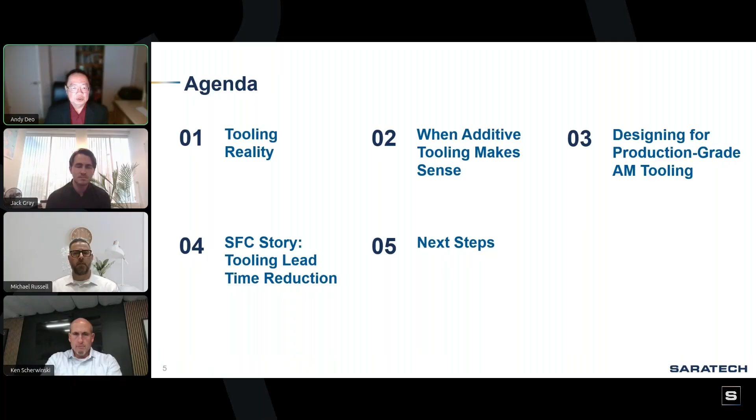In the next 30 minutes or so, we will be discussing the current state of the industry. We'll talk about fit and showcase key additive technologies and practical applications. I will also have an in-depth conversation with Mike and Ken, and we'll explore how SFC and Saratech work together to reduce tooling time from months to weeks. At this point, I'm going to pass the presentation over to Ken Scherwinski. Ken, please take it away.

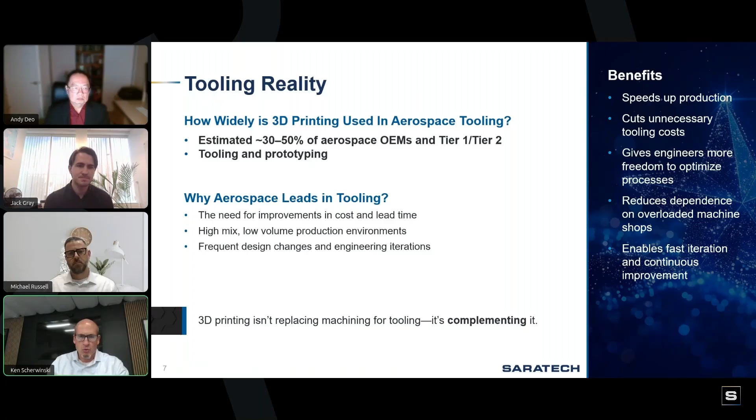The way we've done this with one of our customers who's in the aircraft Wi-Fi space, literally we take this tool, one person can hold it up inside of an aircraft, and we took installation time from 2 days down to about 4 hours. So it was a really effective process to help the installation process. Again, low volume one-offs are ideal.

Quick change is ideal. Metal forming, the challenges in metal forming are taken care of with the form blocks. Again, it's really the technology that we use. We look at the project, understand what's required, and then we look at the solution around that as well.

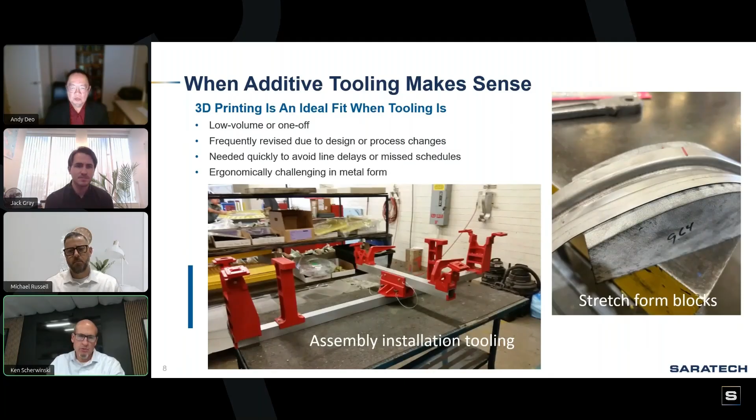We do a lot of work with Pacific Gas and Electric up in the Northern California area. We have done quite a number of tools with them. PG&E, what they do is they do a lot of natural gas piping, and we've developed a lot of tools that help their in-field mechanics do things safer, faster, and with a tighter tolerance. PG&E has been one of our really good customers.

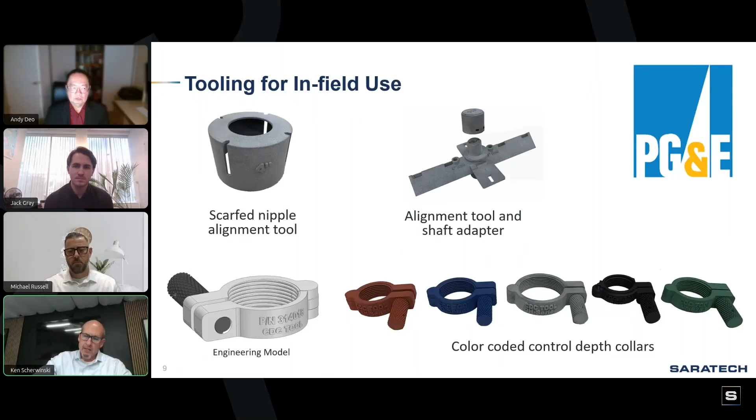It started with them saying, hey, we have a problem. We then just explored that problem, and then we said, okay, well, we can re-engineer something, and then we can 3D print the tools. They've tested the parts, and we have proven successes of how these parts are saving time and money and improving the safety for PG&E in-field use.

All right, my last slide. You might be wondering, well, how does the process work? First of all, typically we like our customers to come with what's called a problem statement: I am trying to accomplish this.

We then say, okay, well, let us take a look at what you're trying to accomplish. Let's look at it from an engineering standpoint, because we have a large engineering team of about 75 to 80 of our 110 employees are engineers. So we take a look at that project and say, okay, well, this is how we can re-engineer it.

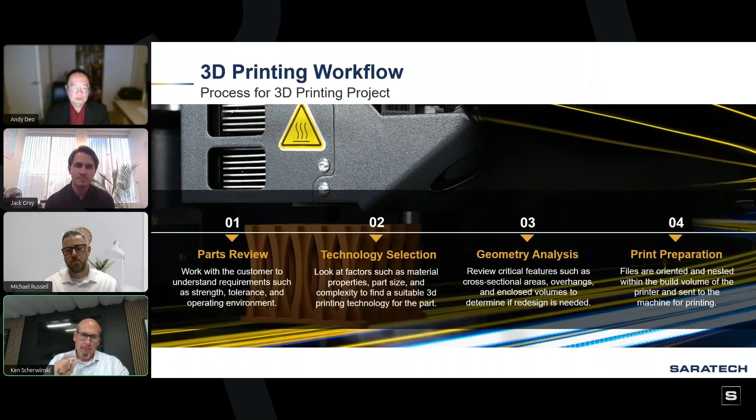Here's the technology we're going to use. Here's the material we're going to use. Here's the geometry and what it's going to look like. And then we prepare the print and then print the parts, test the parts, validate that the design works as intended. And at the end, we have a successful project. Sometimes it might take an iterative process, but we've had a lot of first-time real success in this process. So again, a pretty simple process on how to move forward with 3D printing.

Great, thanks, Ken. So you saw the background behind it, how industries are adapting and moving forward with 3D printing technology. Now, what we're going to talk about is some of the technologies that we use at Saratech and some of the methods that we use to help customers like SFC. So Jack Gray is Saratech's technical manager of additive manufacturing, and he's a lot more technical than I am. So I'm going to let Jack talk about this part of it, where the technology comes in and the process and the methods come in. So over to you, Jack.

Thank you, Andy. Yeah, I just wanted to highlight kind of the 3 different technologies that Saratech uses in its printing farm that we have at UC Irvine. The first technology that I want to talk about is the HP MJF printing. These were used for those PG&E tools that Ken Scherwinski was talking about earlier, as well as those form blocks. The real benefit of the MJF printing with HP is that you have isotropic part properties, which is very unconventional to a traditional FDM part.

Isotropic means that it'll be like a metal part in the sense that it's 100% filled. Your part strengths and dimensional accuracies are equal across the board, unlike a traditional FDM print that you may be familiar with. The printing volumes, as you can see here, I have it in metric and imperial, 380 by 380 by 284, and about 15 inches by 15 inches by a little over 11 inches.

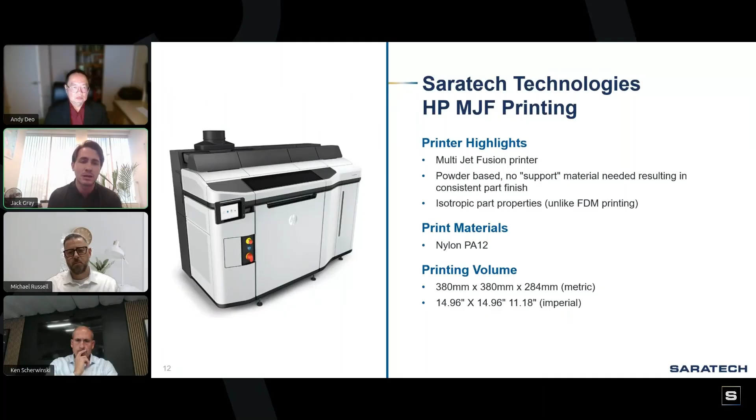The HP process was best for this application because of the powder-based strength that this is providing and the immense amount of weight that these tools can handle.

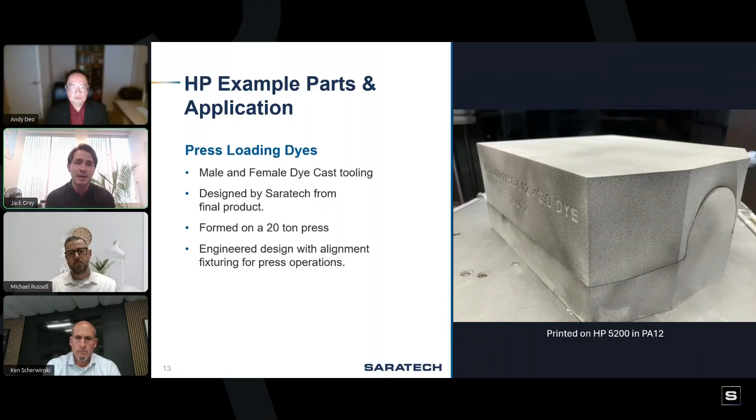The second type of technology that Saratech utilizes is the Markforged fleet of printers. Markforged is known for FDM printers with continuous carbon fiber printing. What makes this unique is that it's able to use a full strand of carbon fiber weaved within the parts, rather than just using a filament with infused carbon fiber.

The Markforged print materials Onyx, Onyx FR, and Onyx ESD are a nylon-based material with infused carbon fiber that can then be reinforced with continuous carbon fiber, Kevlar, and fiberglass. Carbon fiber parts typically result in properties comparable to aluminum-grade components.

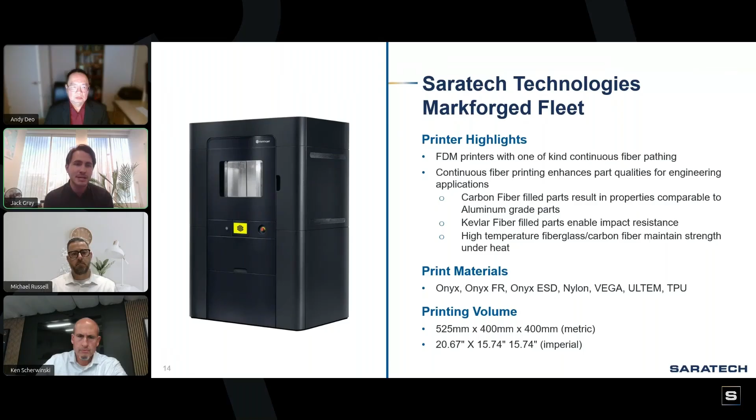The printing volume for our largest machine, the FX20, is 525 by 400 by 400 millimeters, and then about 20 and a half by a little under 16 inches in the other two directions.

Hey Jack, just one quick note here. A reader or someone watching this might think, what if I have a part bigger than the print volume? We've had a lot of success taking parts, creating a lap joint in those parts, and then extending the print size beyond our print volume. It's working quite well, even under pretty difficult loads.

Absolutely, Ken, that's a great point. What separates us from other potential print shops is we're very comfortable modifying components for the 3D printed geometries for all of these technologies we're discussing today. So if you have parts larger than this volume, or something you'd like analyzed, that's where it's best to send those parts over to us for our technical feedback.

This example from Markforged was replacing another pressing die operation that machining aluminum was taking much too long to manufacture. There was lots of complex internal geometry here, and this part was a tenth of the cost compared to traditional manufacturing.

The blue you can see here is highlighting the Markforged slicing operation that's adding continuous carbon fiber strands. That's a unique and patented Markforged technology that only those printers are capable of doing, and again that results in strengths comparable to 6061 aluminum.

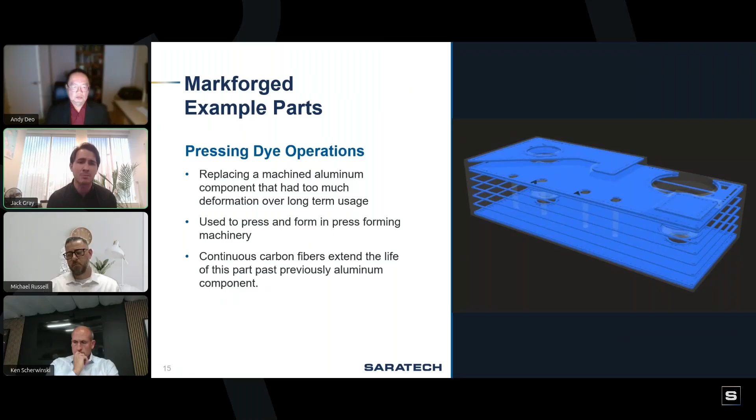Our last technology is the Big Rep Studio printer. This is a large scale FDM printer that functions very similar to a commercial printer, but on a much larger scale, as you can see by the printing volume of 1000 by 500 by 500.

We've seen a lot of success here with what Ken was showing earlier with tooling guides and assemblies for aerospace companies, and additionally trim shells and larger prototyping components that need to be in one piece that are easily machined and manufactured.

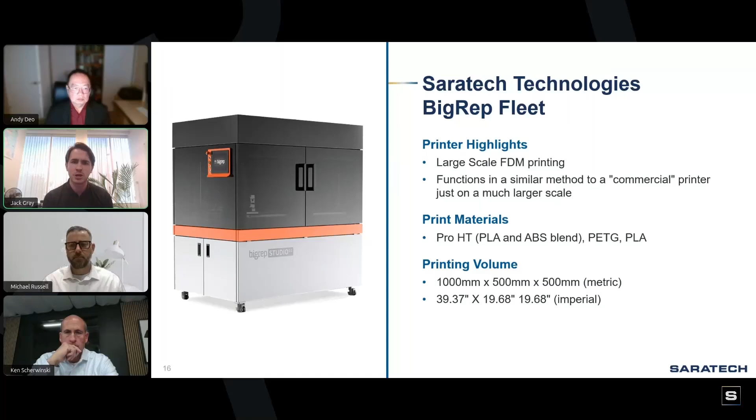So this is a good example of a part. This is a chem mill template that was replacing the traditional fiberglass CMTs that are used. Previous ones were very brittle, prone to breaking after one use. This 3D printed part was reusable, could be used multiple times, and is a much more rigid and reusable structure for multiple passes.

It accelerated the manufacturing time from previous weeks and months at times to just a few days of printing. The length of this part you can see here is about the length of the entire print bed, which is about 1 meter.

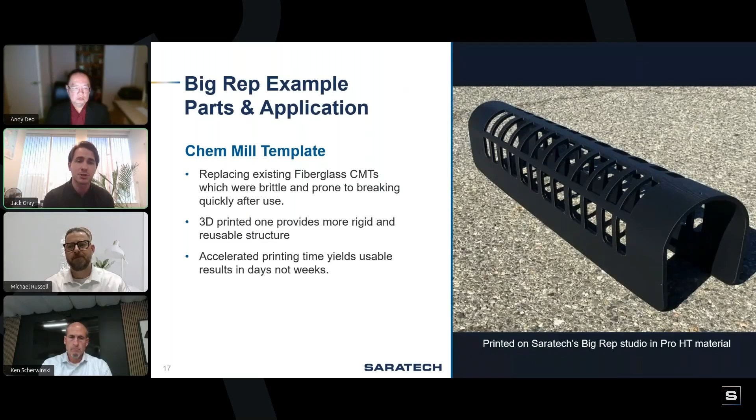This one was 1 meter by 400 by 400. So again, it takes the whole print bed, but was still able to produce a result very quickly and produce aerospace grade components off of this chem mill template.

Thanks, Jack. So you saw some of the technologies highlighted here. Obviously in a webinar we can't go into a lot of details, but if you have any questions you want to talk about in detail, feel free to contact us.

At this point I'm going to change up the format a little bit. We're not going to sit here and go through slide after slide after slide. I'm going to be interviewing Mike and Ken, and we're going to talk about the work that SFC and Saratech have done together, showcased in a real world example of what you can do using additive manufacturing technology.

But Mike, before we get to the interview, tell us a little bit about SFC. Thanks, Andy. Stretch Forming Corporation is a build-to-print contract manufacturer in the aerospace and defense sectors. We're located in Perris, California, beautiful Perris, California. We have 100,000 square feet of manufacturing on 15 acres, so quite a large facility, with about 100 employees right now.

Core manufacturing processes are tooling design and manufacturing to specifically support our manufacturing processes, which are aluminum heat treat, metal forming, which includes stretch forming, hydroforming, and our machining as well. Most of the components we make are primary structure components for the aircraft, all very large components.

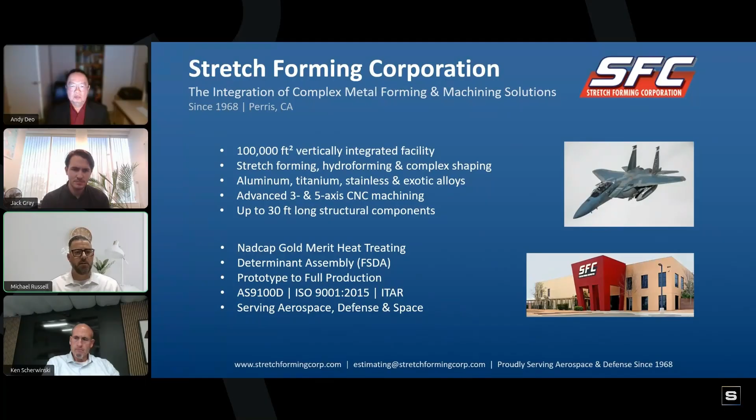For Mike, to set the stage, can you briefly describe SFC and the tooling challenges your team was facing before you started working with Saratech? The last 5 years we've been seeing significant growth on new work, new statements of work. The challenge is anytime you get a new statement of work, first time build, there's a lot of tooling that goes along with that. When you're receiving hundreds and hundreds of part numbers, you need to design and manufacture all of the tooling to support the manufacturing processes. That was our big challenge - this huge influx of new work and all of the long lead time required to manufacture all that tooling.

Ken, from an engineering services perspective, how common are these tooling challenges across aerospace and defense manufacturers? Almost every part that we encounter that's put on an aircraft or a car, any type of part really, requires tooling and requires manufacturing. So the tooling needs are very pervasive. There's typically a lot of cost and lead time associated with that, and the churn like we spoke about. It's a very common problem, and we've seen those customers that have adopted the technology really starting to accelerate their business.

Yeah, I mean, I totally agree with you. We're seeing this all over the industry.

So, Mike, specifically, what pushed you to consider alternatives to traditional tooling methods? Was there a breaking point? Yeah, there was a specific breaking point for us to consider alternative manufacturing methods for tooling. We'd run into Ken at the Paris Air Show, and he presented the fact that you guys were already developing some hydroform tooling for the industry that was additive. When we got back to the shop, we had a very successful trip up there. When we got back, we actually got slammed with a huge award on the B-52 nacelle program.